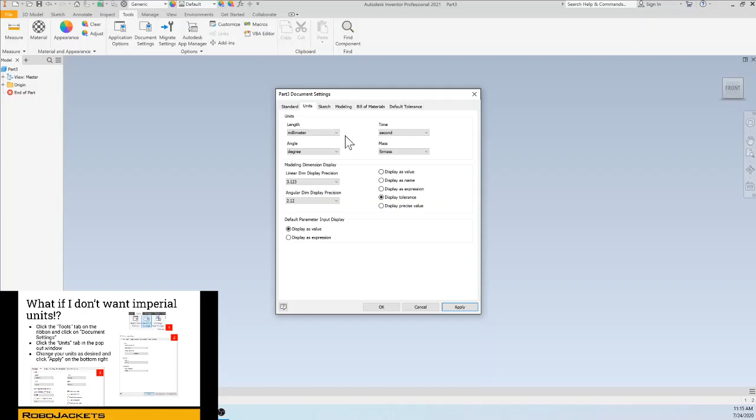And this can be useful for when we're creating DXF drawings for the water jet or for the 3D printer. It can be useful to have different units. But remember, you can always type them in. Another thing to note is that when we're using the document settings, it's only going to be for this current part. So if I open up a new part, the change of units won't carry over. So you have to remember to make the change every time if you want to have it.

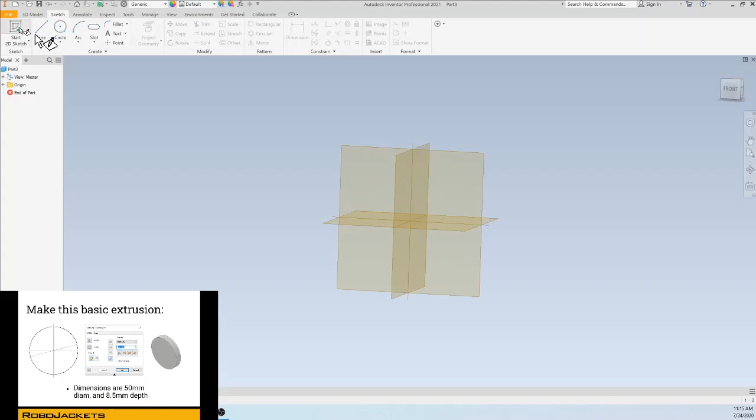So now we're going to start with a basic extrusion, and by now this should be pretty easy. It's just a simple circle with a diameter of 50 millimeters, and then a height of 8.5 millimeters. And now we're going to make a hole. So the thing with holes is we don't want to necessarily just create a circle and then extrude cut it. We want to use the hole feature. And we could use a circle for that, but it limits us.

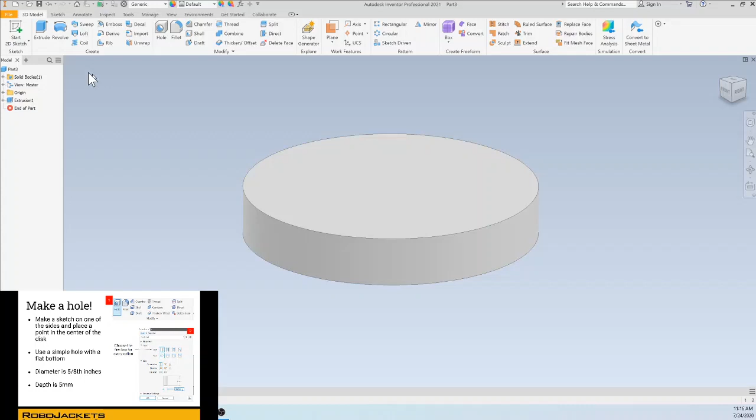So instead what we're going to do is start a sketch, and we're actually going to use the point, which is right over here. And we'll put it smack dab in the center, and we go ahead and finish. And then when we use the hole feature, it'll automatically select this point that we made. And so now you can see we have a ton of options of the different holes that we can make.

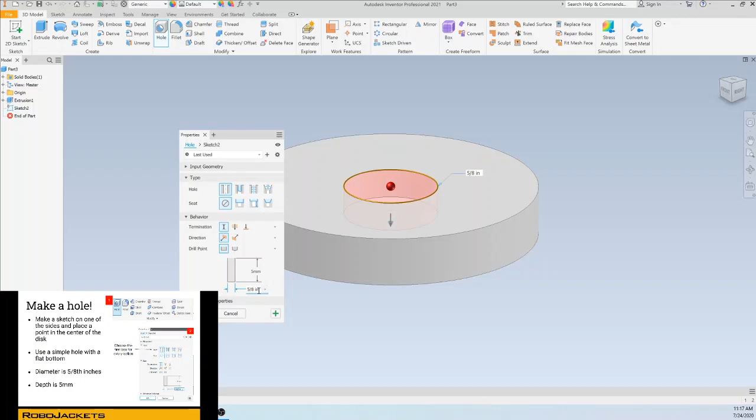So we're going to make a simple hole, which means there's no tapping in it. It doesn't have a seat, and then we're going to terminate it at a distance. It may default to through all, but we're going to change it to a specific distance. And we'll make it a 5 millimeter depth and a diameter of 5/8 inches. So I've got to make sure I include inches in this dimension. And as you can see, it changed the size pretty dramatically.

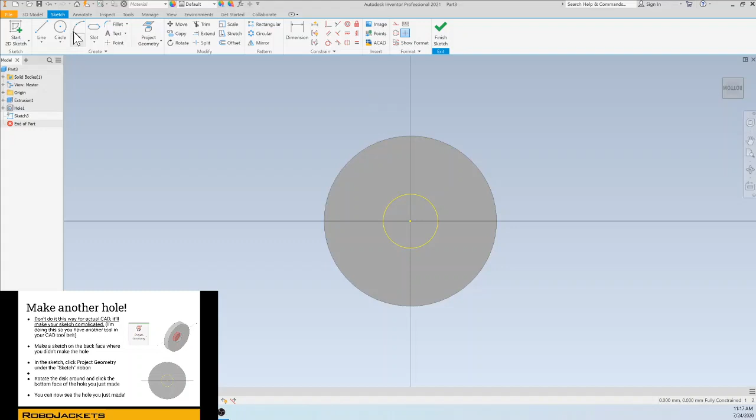So now we're going to make another hole on the other side. And keep in mind, this is not necessarily how we want to make holes, but it's just another option of showing you what you can do with Inventor. So we're going to be using Project Geometry to take that cut that we made, and now we can reference it as if it's on this sketch. So I'm just going to make a hole right off to the side, it doesn't matter where. And we'll make it a diameter of 0.475 inches.

And then to constrain it, we can use this Concentric constraint up here. So this is the one I want to move here. And just like that, it does it for me. And since this projected geometry is fixed, it knows which one to move. If neither of the circles are constrained, it can be a little unpredictable which one will move and which one won't.

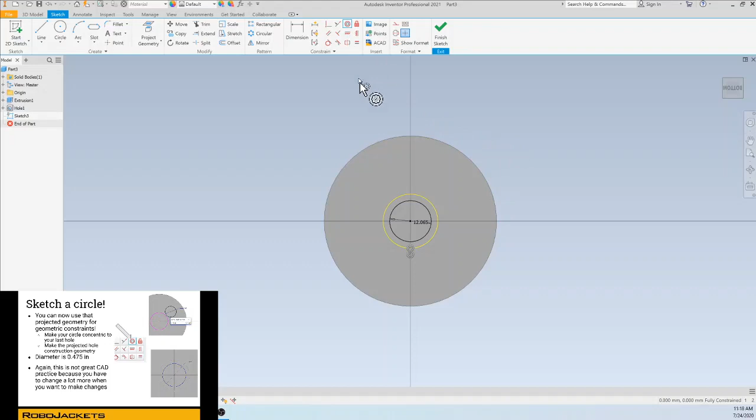So I want to point out that this isn't great CAD practice, because if I ever changed this other hole, things might break. But since I know that this is what the part is going to look like, this will work for now. I just wanted to show you the concentric constraint and another use of project geometry. So we'll go ahead and finish this sketch.

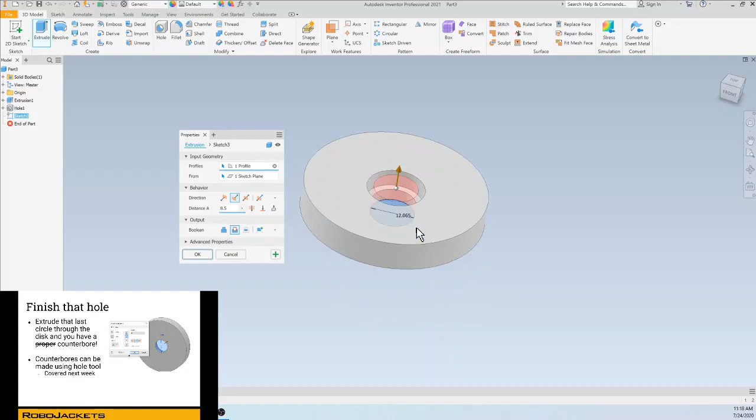And then we're going to do the extrude cut with this inner circle. And it can go all the way through. So a distance of 8.5 gets the job done. I could also do the through all. It doesn't matter as long as it gets all the way through. And so this is a counterbore of sorts, but we're going to cover exactly what a counterbore is next week, and the hole tool that we can use to do that.

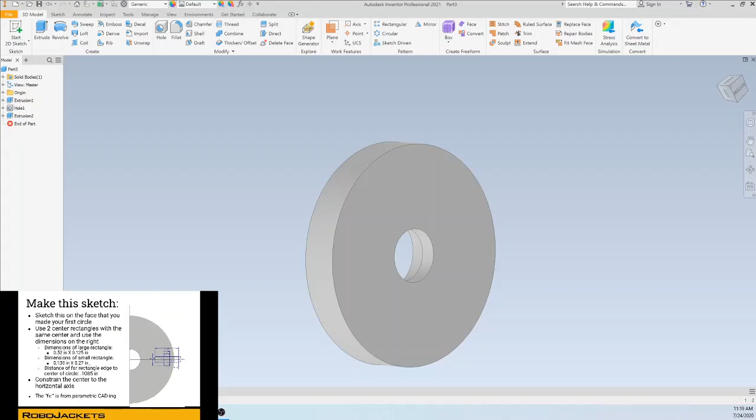So now we're going to make another sketch, and so we're going to go over to this first circle that we made and create a sketch. And then let's go back to rectangles, and we're going to do the 3-point center rectangle. If you're not sure the order to click the 3 points, just hover over it and it'll tell you exactly what to do.

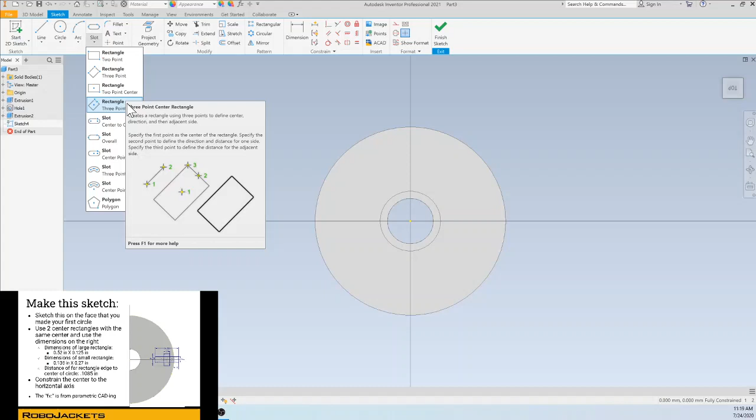So we'll go ahead and create this rectangle. Even though it looks like I'm only going over to the right side, it's actually extending in both directions. I can specify that I want it at 0.52 inches, and then a total height of 0.125 inches. And then the same thing here, it's going to be going straight up with a height of 0.27 inches.

Because my document is in millimeters, I have to specify inches every time. And then 0.135 inches.

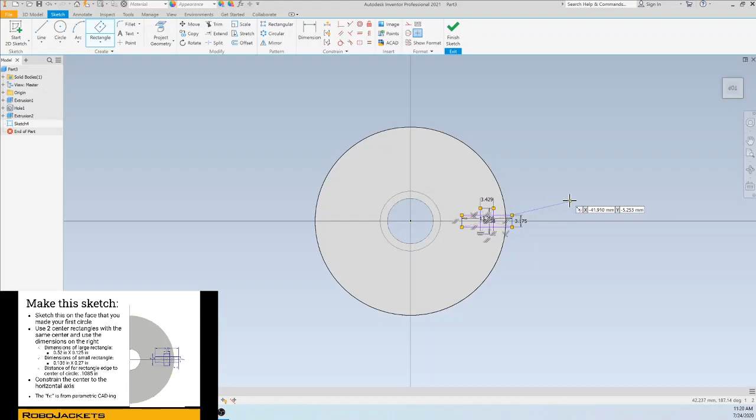You'll see that it's all purple because I haven't fully constrained myself. There are a couple things I need to fix first. The first is the distance between the edge of the circle and the edge of my rectangle, and that's going to be 0.1085 inches. You might be thinking that's extremely specific, and why would we need to be that specific? Well, sometimes with machine parts, things have to be really minute with details, because if we're going to be producing them with really specific machines, we can achieve that level of detail, and it's worth paying attention to.

But you'll see that we still have some constraints missing, and that's because I can probably move it up and down. So here's what we'll do: we have to constrain the center to the horizontal axis. You'll see that we can constrain the center to this axis, and all of a sudden it turns all black, and we know that we're fully constrained, as we can see in the bottom right over here.

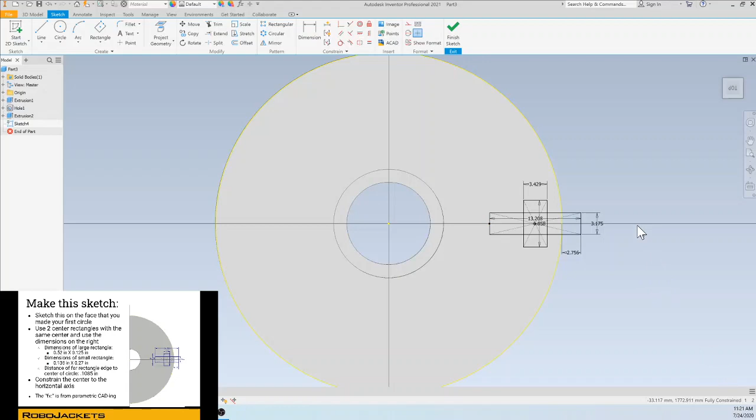So now that we've finished that, we can go ahead and create some features. We're going to extrude cut this long rectangle. I could have selected all the different little cuts, but if I hover over in the right spot, I can select the whole thing in one go. And we want to go all the way through.

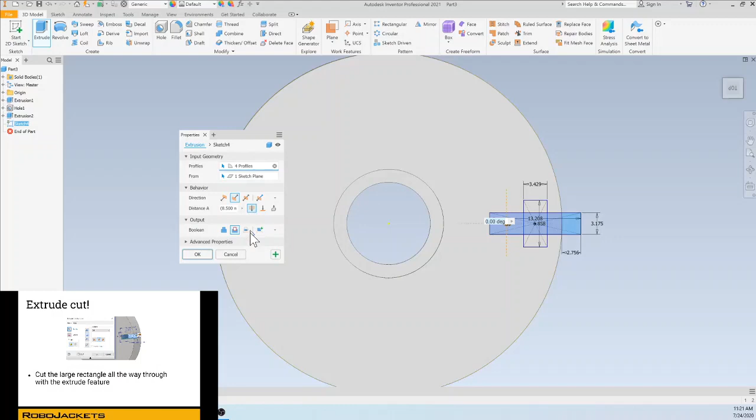Now the second cut I want to make with the same sketch. But as you can see, the sketch disappeared. So to make it visible again, all we have to do is right-click the sketch and add visibility, and now we can interact with it again.

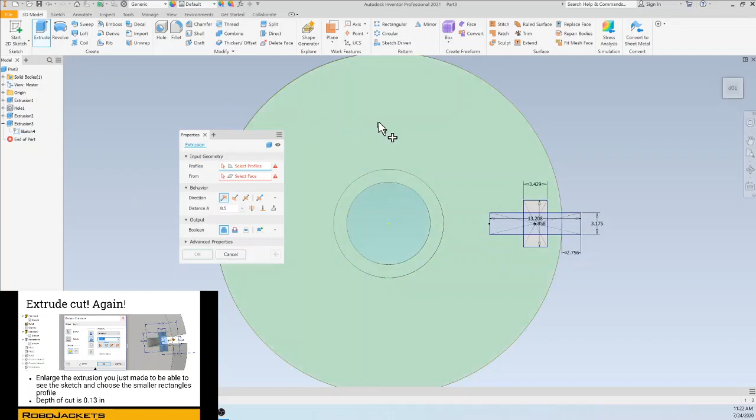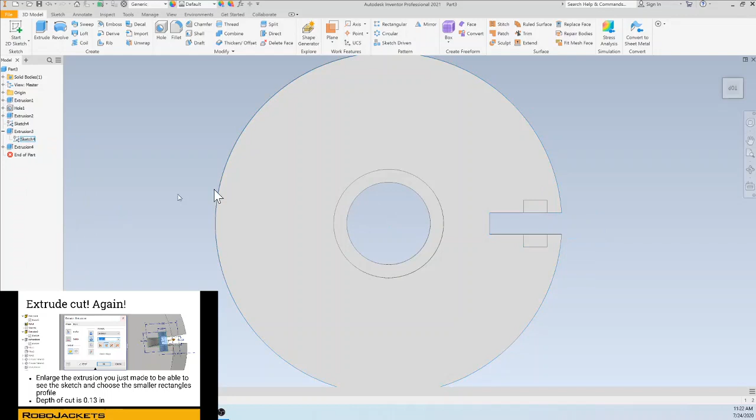So I can choose this rectangle here and make another cut, except this time it's going to be 0.13 inches. And then, for simplicity, we're going to make this invisible again. We can see that we have our two cuts exactly as we want them.

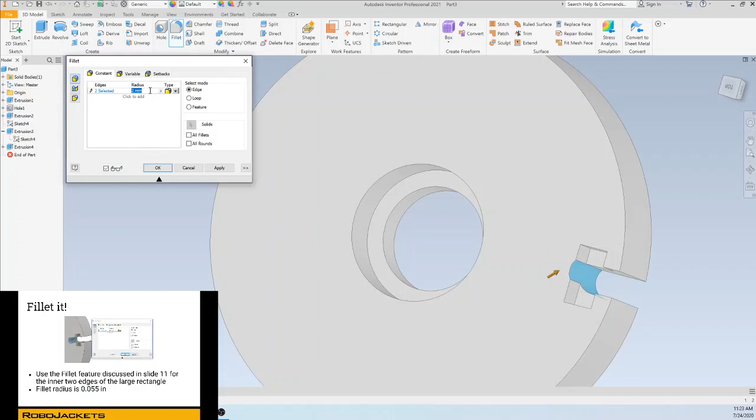So now we're going to be using some fillets. We'll select our two edges here, and you'll see that because the size is wrong, the fillets aren't possible without creating this little semicircle here. So we have to edit the size to 0.055 inches.

And then we're going to do 4 other fillets. Remember that if you click the wrong edge, there's no way to deselect fillets, so you just have to start over. Hopefully you don't have to deal with very many edges at the same time though. So go ahead and click these, and just so you know, you can select through solid features, you just have to be very careful.

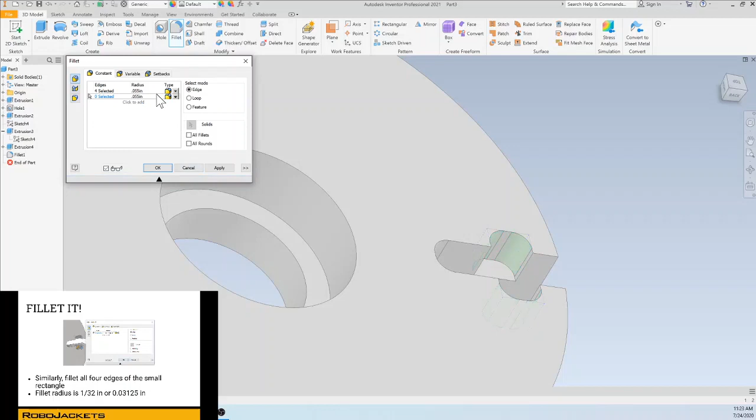So we'll go with 1/32 inches.

So we want to use fillets for a couple reasons. We know that there's not going to be much load on these wheels, but we also know that when we're going to be using a mill, which we'll be going over in a couple weeks, the end mills are round. So when we're cutting things with those mills, it's way easier to get rounded corners than sharp corners, unless it's on the outside, but even then it's very difficult. If we're going to be wanting really sharp corners, we'd have to use a different machine, which I don't believe we have in the shop, and it's very expensive to get that done. So we just stick to filleted corners.

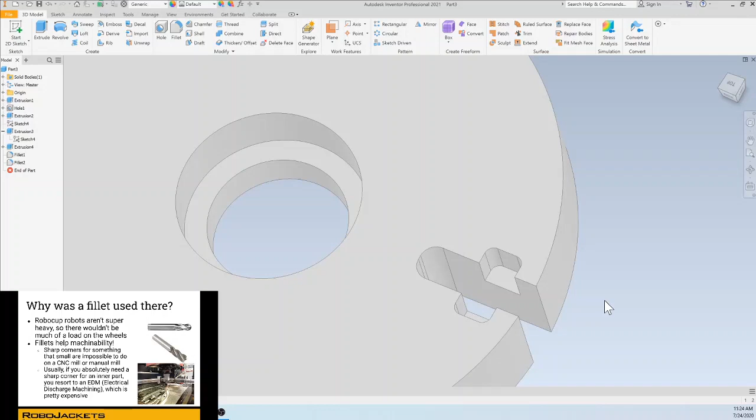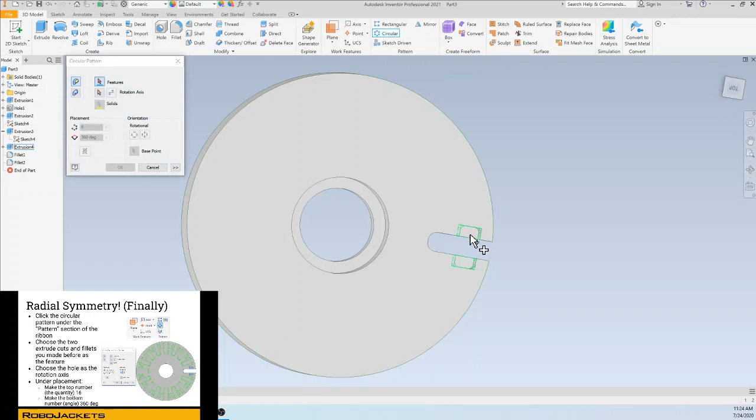So now we're actually going to be doing the radial symmetry, because I don't think you guys want to do this 15 more times. So we're going to use the radial symmetry pattern. If you go over in the pattern box over here, you'll see that there's a circular one, and we'll select all the features that we drew over in this shape here.

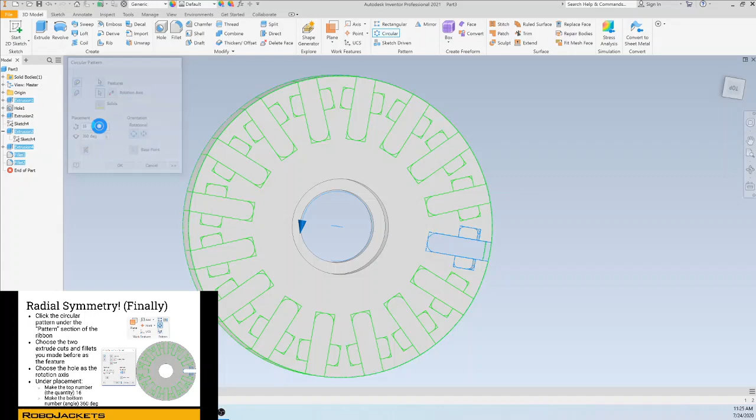And I accidentally selected the main circle, but since we're rotating about this axis, it doesn't matter too much. We selected that it's going to be 360 degrees, and it defaults to that. Instead of 6, which is the default, we want to make 16. It'll take a second, and then all of a sudden, boom, it's done. Except we have a small issue here. Oh, you know what? Selecting the whole circle was an issue, so we have to delete that and start over. So you have to be very specific with what we select.

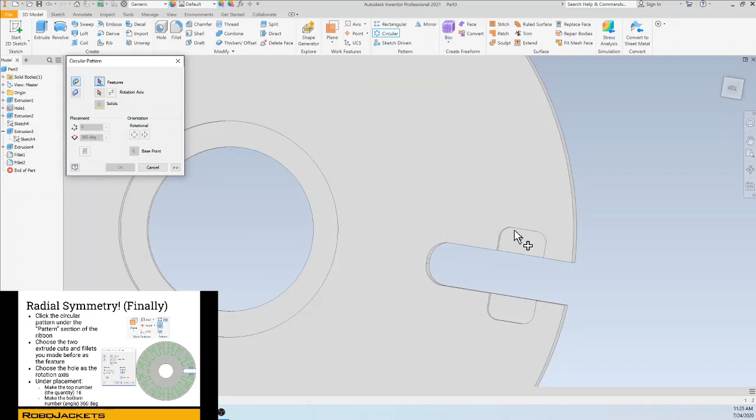And then for the rotation axis, we don't need a specific axis. We can select just a circle, and it'll select that axis. And this time, we have exactly what we want.

So just to go a little more into the circular pattern, you have to choose a feature, the axis we'll be rotating about, and the number of instances over the specific angle. If I had selected a different angle, such as 270 degrees, and I still wanted 16, they would be evenly spaced around that angle, and I'd be having a whole chunk left blank. Of course, you have to keep in mind if all those features will fit, because if you put in too many, then they'll overlap, and the cut will look really awkward.

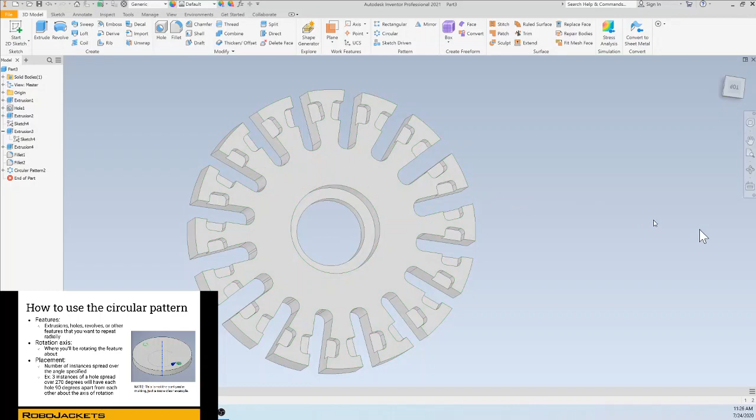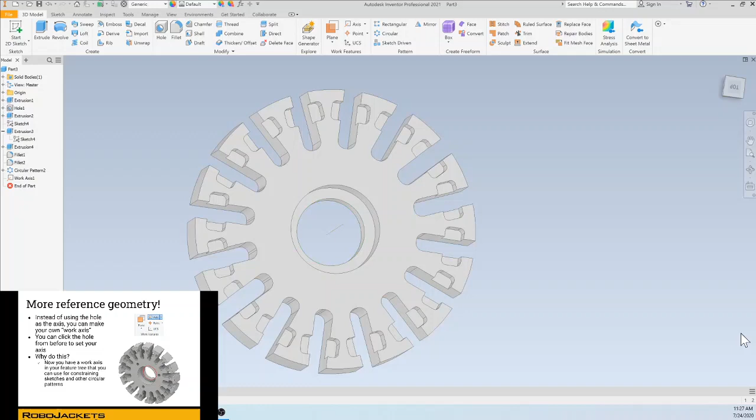So now I'm going to show you, it's not necessary, but I'm going to show you how to use it. We've used work planes in the past, but we can use work axes as well. All I have to do is select a circle here, and it'll automatically place this axis in the center of it. So we can use this for further constraints instead of selecting just the circles. Again, it's not necessary, but it's a helpful tool to know about.

So let's do some more patterns, all right? We're going to start a sketch. I'll start it on this other side. And it will be a point on this axis. And I'll give it a dimension of 0.45 inches.

And if you've noticed, we've been using a lot of inch dimensions, so that if you really wanted to change it back, it won't mess up the rest of the part, because it'll simply transfer the unlabeled dimensions to what they were. It'll take the dimensions that already exist and convert them accordingly. So don't be afraid of changing your units in the middle of a part.

So we want to make sure that this point is actually fully constrained, because even though it's assuming I'm placing it on the axis, it doesn't know that for sure. So we'll go ahead and make it easier on the computer. Now we're fully constrained.

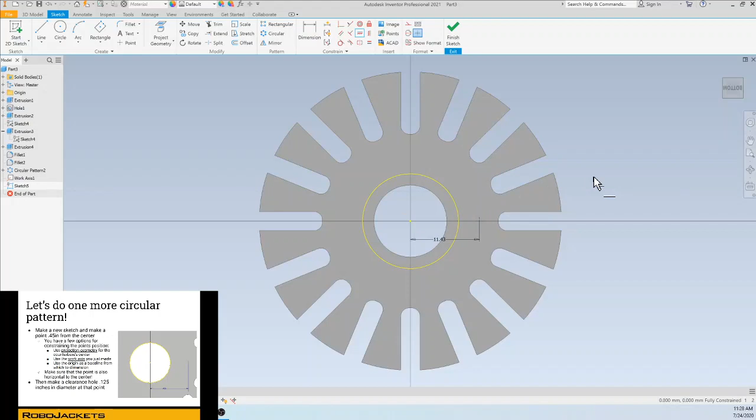And then we're going to make this clearance hole. When we say clearance hole, it means it goes all the way through, so it'll be through all, with a diameter of 0.125 inches. So again, I could have projected geometry, I could have used this work axis, but as you can see, I just referenced to the origin of the axes.

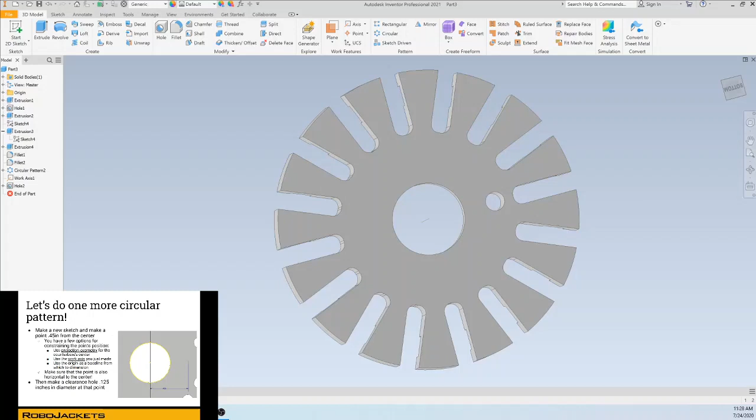Okay, so now that I have my hole, I can make another pattern. So we'll go ahead and select the feature, and then the rotation axis. For this, I'll select my work axis and then make it 3. And we're almost there. We just have 4 more holes to make, so 1 with a rotation symmetry.

So we're going to go ahead and make another sketch on this side. And because it's going to be at an angle, it's nothing that we can snap to, and we want to be careful we don't snap to any of these other geometries on the wrong side. So what I'm going to do is use a line, and when I go out, I can specify the length, which will be 0.875 inches. And then I'll tab over to the degrees and make it 11.25 degrees. And then to avoid confusing myself, I will right click this line and make it a construction line.

Now I can put a point and just smack it on the edge of there, and you'll see that it's considered constrained because I fully constrained this line and then snapped at the end of it.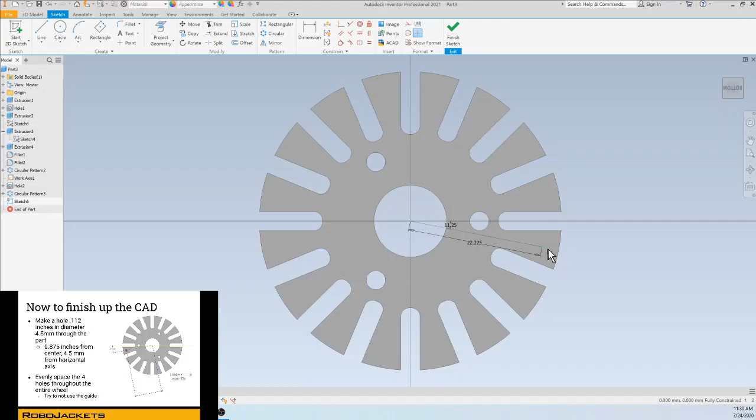So one more time, we'll make it a hole, just a simple hole, but with a distance of, we'll make it 4.5 millimeters, so it doesn't go all the way through. And I accidentally made it the wrong diameter, so I'll right click this feature in the feature tree, then I'll do edit feature, and I can change the diameter to the correct 0.112 inches.

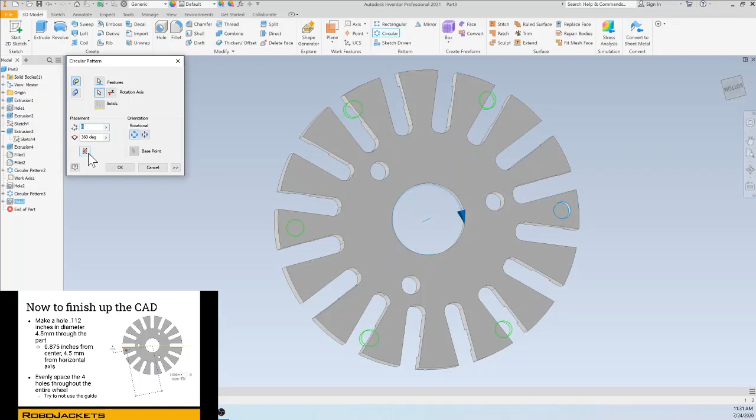And then finally, the circular pattern, just as before. And then this time, 4 holes.

Congratulations, you've made an actual RoboJackets part. And it looks pretty complex, but as you can see, it's just a lot of features we already knew, plus some very simple features and tools that you learned that make things way easier.